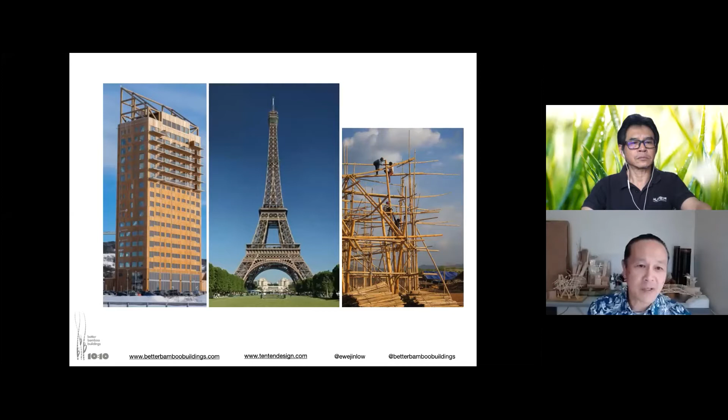Thank you. I usually start my talks with this slide. We start from the left. Today, currently, this is the tallest timber building in the world at 83 meters. And in the middle, you will see a familiar building, the Eiffel Tower, at 300 meters. Strangely enough, it was completed in 1889, not 1989, but 1889, some time ago. And to the far right, you will see...

almost like a 3-story bamboo building on a little island called Sumba in Indonesia. I always put this in to really compare how bamboo is re-emerging. It is an old material from many thousands of years ago, but it is re-emerging in the world. It has a lot to catch up on.

There are only a few ISO standards in the world for bamboo. But if you think about timber and steel, there are hundreds and hundreds of standards that we all in the design and building industry use, are familiar with, and are moderated by. Whereas bamboo is young, it is a new kid on the ground, and it is slowly re-emerging.

I also share this particular slide because through the generations, bamboo has had a terrible reputation. It rots, it has fungus on it, it cracks, it doesn't last. The little bamboo hut that is in the paddy fields that we are used to, our grandfathers used to say, oh, 2 years and I have to replace everything. I have to get the roof up, I have to get new poles again, and the bamboo is eaten by termites. So the reputation for bamboo is not good.

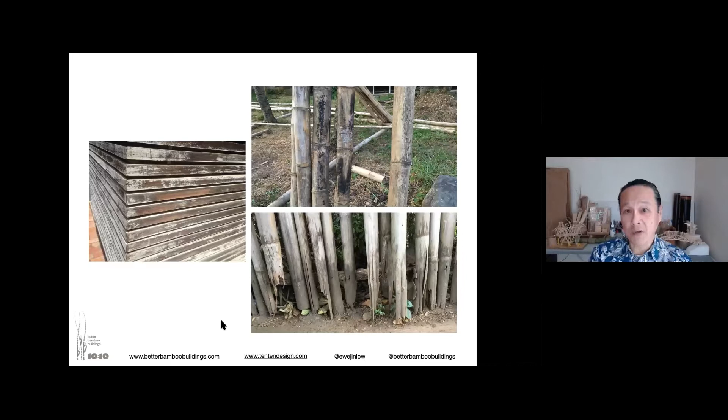But if you treat bamboo well, if you design bamboo well, it will not rot, it will not fade, it will last a lifetime. Let me go through some of the hotspots of bamboo, especially around the ASEAN nations, and a bit about South America.

This is to give you a bit of an overview of what is happening around the world with bamboo architecture. We don't see much of it in Malaysia, right? Although this is slowly starting to change, but around the world there are many bamboo buildings, many fascinating and impressive bamboo buildings. Let's start with Vietnam on this slide.

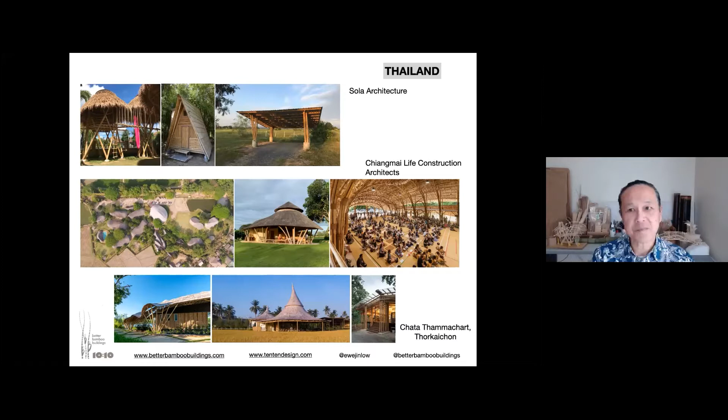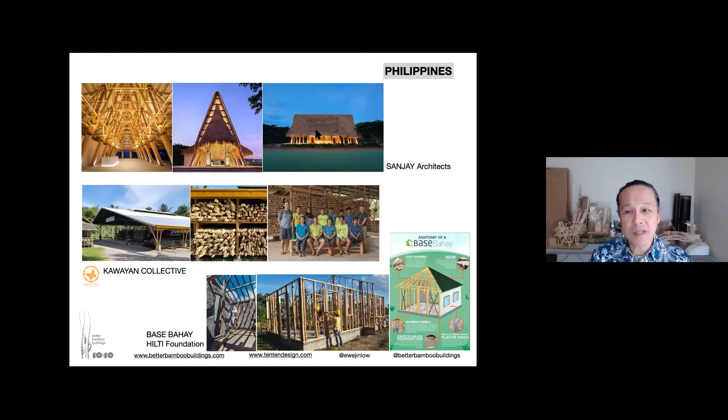From the Philippines, we move to Indonesia. Indonesia would be the prime hotbed of bamboo. A lot happened from the 2000s when the World Bamboo Congress was held there, and people like Linda Garland started off bamboo in Bali in a very big way, together with, of course, John Hardy, who got into it, and then later Ibuku and Ilora Hardy.

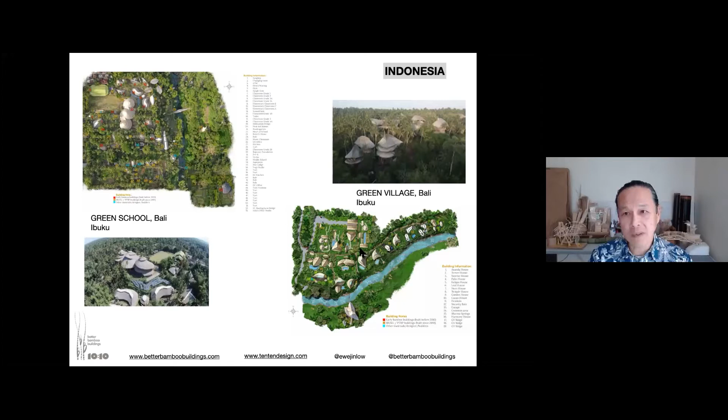Green Village has more than 20 bamboo buildings, some of which are really luxurious and trend-leading. This school in Bali, also by Ibuku, has more than 20 bamboo buildings, and they are all full bamboo buildings.

The amount of buildings and the stage at which all these were built created almost a bamboo explosion within Bali, within Indonesia. The need for good treated bamboo, people who could draft, design, and build in bamboo—we managed to pull out within Indonesian culture the creativity and strength to build these buildings. In Bali especially, you can go to a hardware shop to buy a piece of treated bamboo, place an order, and it'll come.

I hope to see more of this in many ASEAN countries, and I think we will continue to see growth in this way for many countries around ASEAN. In China—

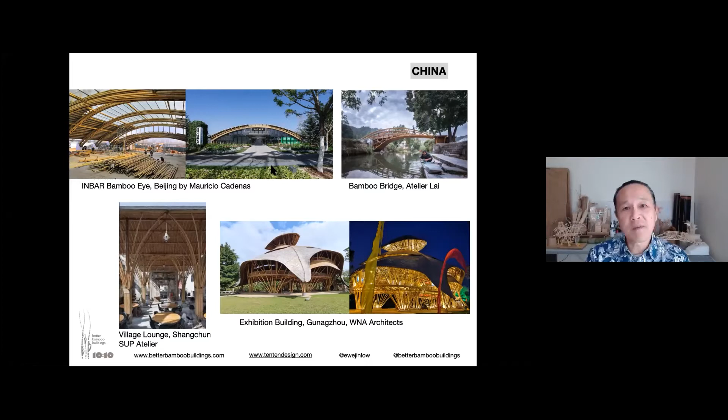An emerging firm, Arquitectura Mixta, from Colombia—Jamie and Uma and a few others. This firm you have to look out for; they are really coming up within South America, and their work is significant. Look them up on Instagram. The LUUM Temple involves Arquitectura Mixta as well—it's a beautiful grid shell building. Have a look at that.

Jorg Stamm is another pioneer. He is from Colombia, based in Costa Rica, and does a lot of reciprocal structures. He was fundamental also in setting up a lot of buildings in the Green School.

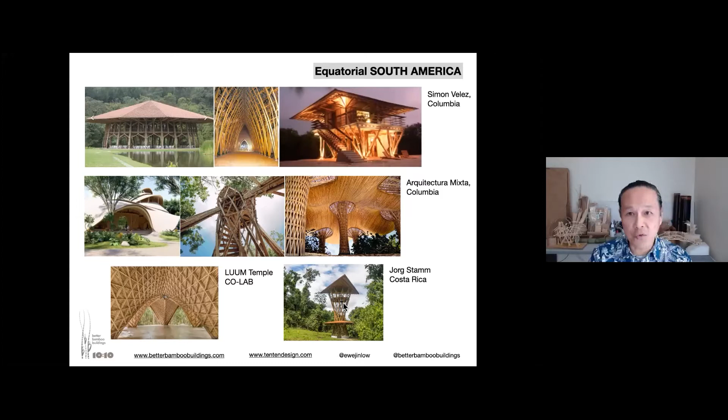The idea of showing you all these buildings from different countries is that I wanted to put in place a bamboo buildings map within ASEAN. In Indonesia, there are more than 200 bamboo buildings, many accepted and approved by the authorities. In Thailand, more than 70 buildings. In Vietnam and the Philippines, more than 30 buildings each. This has happened through Southeast Asia from 2010 onwards, where the use of bamboo in architecture started ramping up.

These are really not exploited yet due to maybe not enough treatment facilities, improper harvesting, and all these need to be raised up, equivalent to the other countries I mentioned.

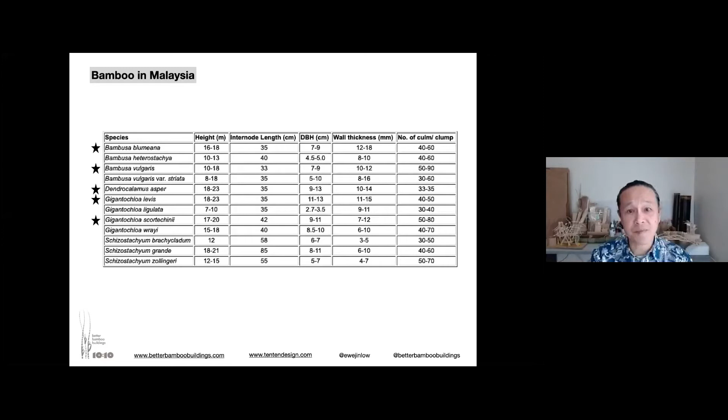In my journey pre-COVID, I also managed to spend some time in Sabah, looking at some of the species in Sabah because we had a potential project there.

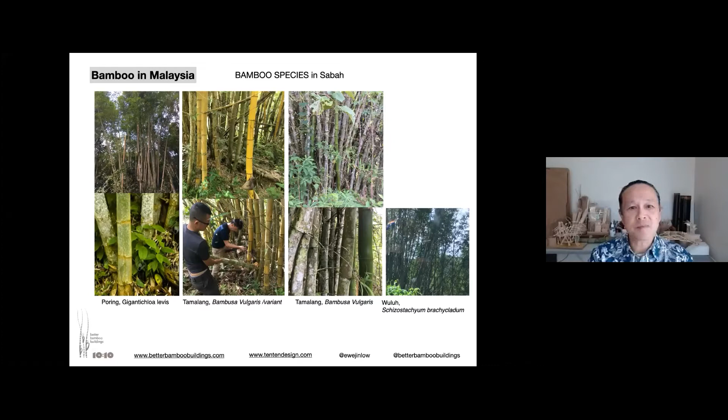And of course, you need training, you need precedent, and you need a lot of development. The government itself cannot do it. For most of the countries that I've mentioned before, through experience and through discussing with people, it is very tough to get government to move. We need a lot of other protagonists from the NGOs and also individuals that push. Dr. Tan mentioned Ahmad Mazlan, and of course there are a few others within Malaysia, like Lucas Lu of SEED, who's really pushing in terms of upstream bamboo infrastructure to get this going. And it will happen, it will happen.

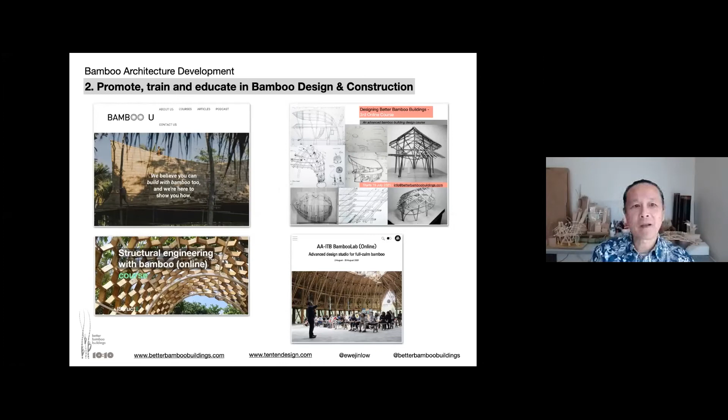To move bamboo ahead and to be able to socialize this with government and compliance organizations, that's very important. As Dr. Tan was saying, when you mention bamboo to engineers or even to approving authorities, they almost fall off the chair and say, no, I don't know anything about bamboo and there's not much knowledge. But this is changing, as you can see, from all these hotspots. All these buildings are already up, they have permits and they are going.

How did that happen? How did that happen in more countries than others? It is a process of socializing and familiarizing, using ISO standards, for example, this new ISO standard that's come out only a month ago or less, gives you the standards to be able to design a 7-meter bamboo building.

And I think some of the ways, through my experience working with authorities and compliance, is to socialize with them, show them what has been done around the regions, even take them, if the project is big enough and the budget is right, take them on a visit, take them to Green School, take them to other countries, to Thailand, to Philippines, to see what's been built.

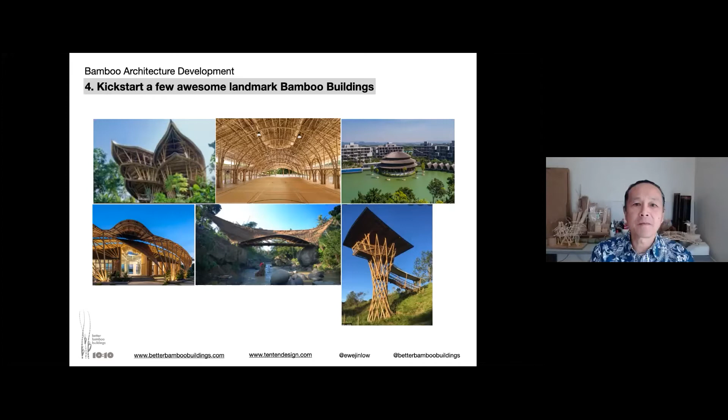I'm trying to share with you also a bit of my bamboo journey, if you don't mind. A lot of it, as Scarlett mentioned, started as lead architect in Ibuku. It was a 3.5-year period of total immersion, and I thank Ibuku, actually. I thank Ibuku and Elora and the team for imparting all this to me, having immersed now to be able to share what I learned and continue to learn in bamboo. I hope to continue to develop together the bamboo architecture world.

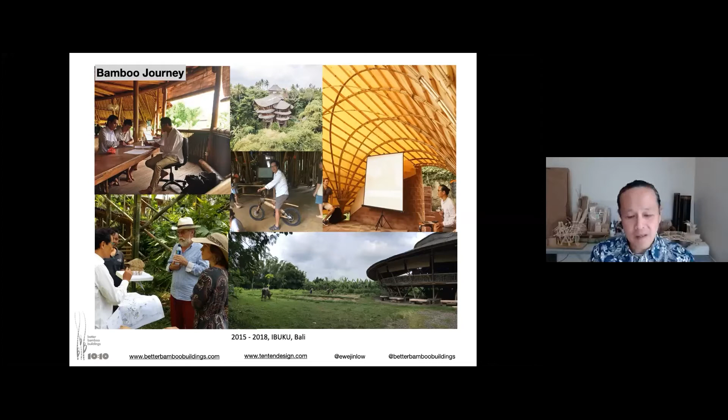As I was leaving Ibuku, I had the privilege, together with my wife Ling, to design and build this house, Kamsia House. Kamsia means gratitude - it's gratitude of being able to build this house and live within nature. As architects, a lot of us design and construct houses for other people, but I've had the privilege to design, construct, and live in a bamboo house, to experience it, being able to live in it for two cycles - two years - to see how the house performs.

We also managed to build a little tree house in front of that house, near the stream, and again learning a lot from it as well.

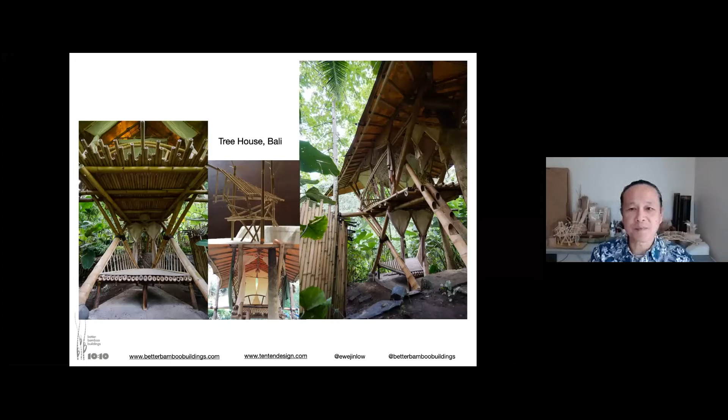This was KLAF two years ago. A real privilege, and a lot has happened since then from Klaf.

I managed to do some work with universities in Singapore, holding workshops. And this project is interesting - this is a foundation that's trying to propose a jungle school, a bit different from the green schools you're seeing, but their own version of a jungle school in Sabah.

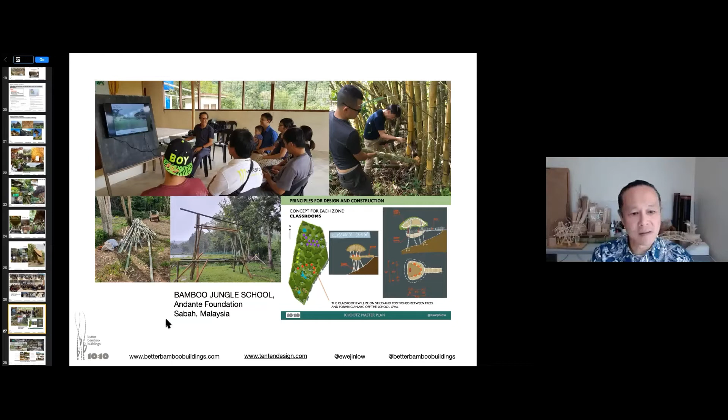From KLAF 2019, I hooked up with EPIC, a great bunch of people doing good work. They do a lot of work in the Orang Asli community, and my work with them is looking at their design, looking at how they operate, and also trying to push bamboo into their scope. I hope one day they will eventually build their first full bamboo Orang Asli house. Come on, EPIC, those who are listening.

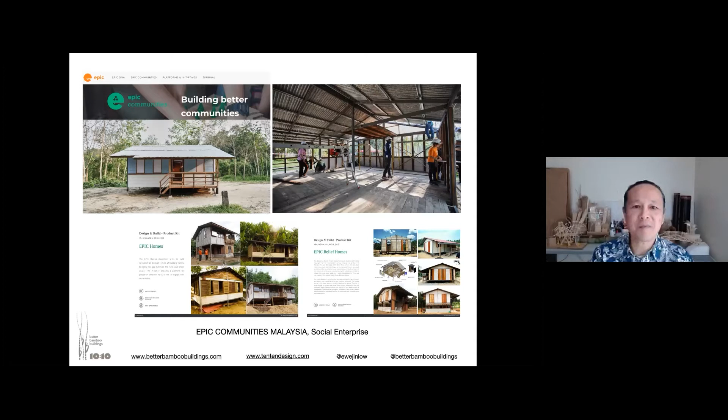I also want to put a plug for this young man, Daniel Thiel. You will notice if you go to CNA News that he has been featured today, top first page. His work is really working with the Orang Asli as well, trying to help them. His most recent venture is biji buah durian, selling Asli durian - different species, 10 to 15 species that you can order online. Go and help this young man, and also, of course, the Orang Asli.

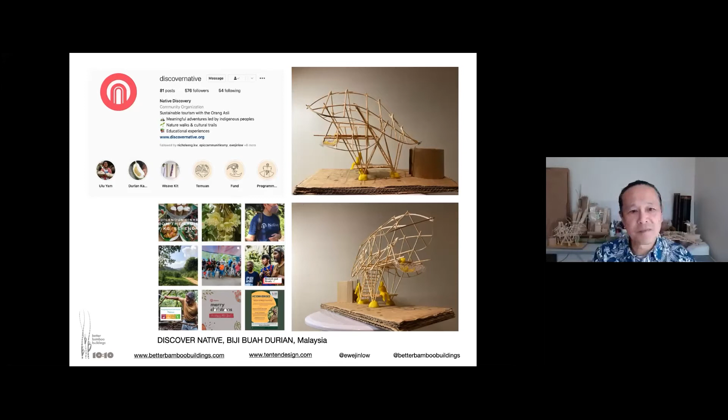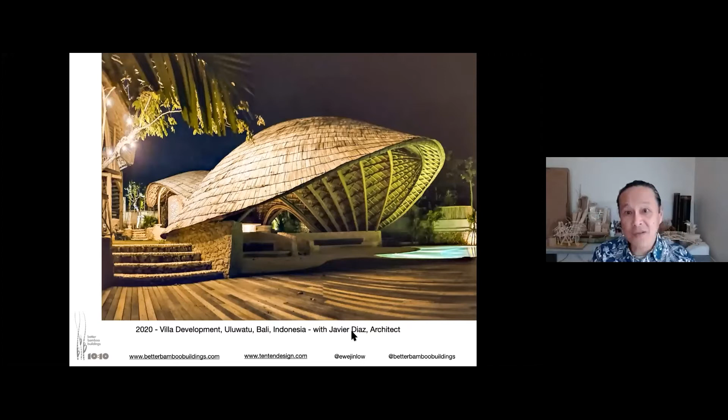Lately also, I finished with Javier in Bali, this resort project. We just completed it now. Fingers crossed, we're hoping for tourists to return to Bali to be able to enjoy this building.

So coming in to the close, I'd like to share a few more things. Scarlett mentioned this Instagram account that I started during COVID.

I had to pivot, think of something else to do because we were stuck in a little cabin in Melbourne. I started this Instagram account called BetterBambooBuildings. This has now grown quite well over a year and a bit.

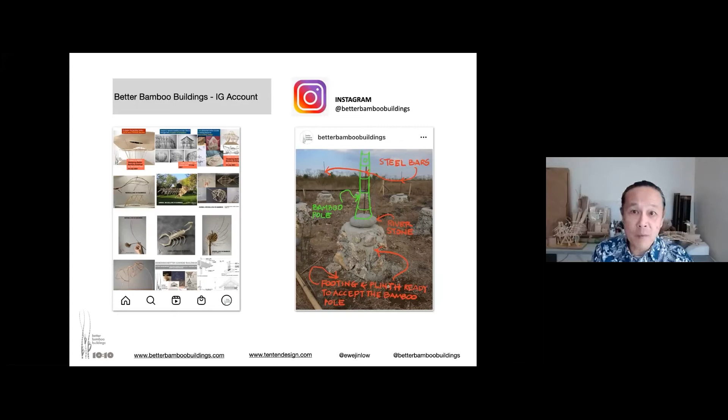From the Instagram account, I wanted to share further and set up a blog with articles on bamboo, where people could come as guest bloggers and share what they have. We now have about 30 articles on it—please go on it if you want to find out more. There are 2 articles coming out in the next week or two, which I'm co-writing with Alvin Tejada from the Philippines, and also another article with Carmen Yong from Malaysia.

From this blog, which has grown quite well and is getting good response online, I started an online course on designing bamboo buildings, which has now just started its 3rd run. Hello to those listening, participants out there. We are looking forward to starting the 4th one in October.

From the course, we have the privilege of writing a book, coming out at Christmas. It is a book on bamboo architecture, and we have selected 30 contemporary bamboo buildings to feature.

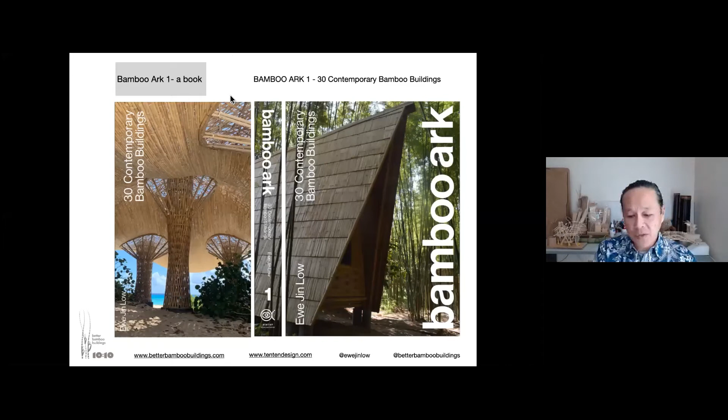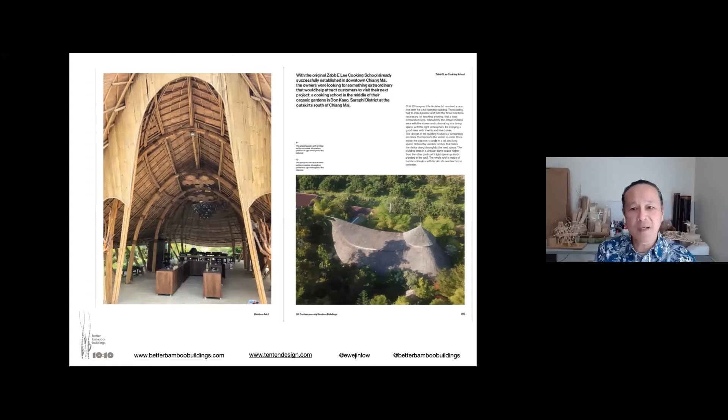I'll just run through this now, coming to a close. One of the buildings is from Chiang Mai Life Architects—this is a cooking school, and I'll show you a typical spread of it. These are the early layouts. This book really concentrates on how a bamboo building is structured.

You can see from here, going through the elements of the structure and discussing it, and of course talking about the buildings as well with wonderful photos that these designers and architects have provided. Some with really good drawings and interesting construction stages as well.

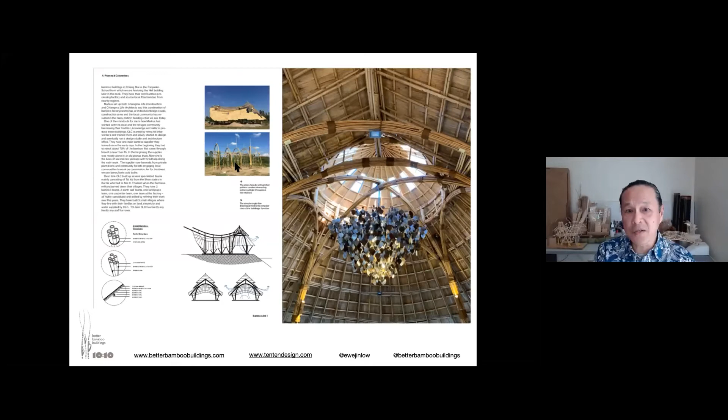So there you go. I hope that this has conveyed a bit about bamboo architecture. I'll just end by saying, as surely as the sun rises every morning, bamboo will also rise and shine. Thank you.

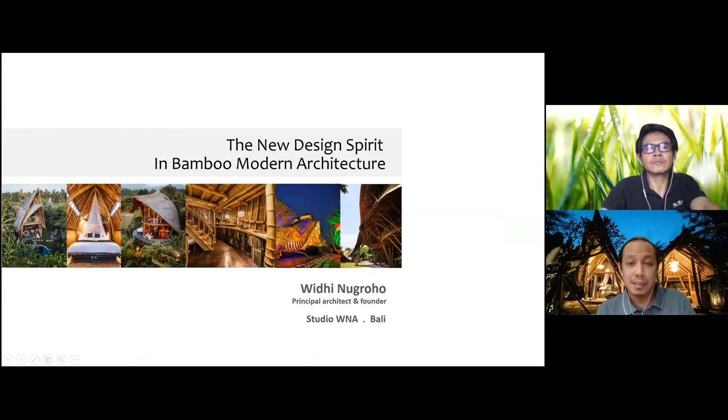Okay, I will start my presentation. My name is Widhi Nugroho, I come from Bali, Indonesia. Studio WNA is a bamboo architect specialist in Bali, Indonesia, and many of our projects are in the hospitality business, such as a bamboo beach club, bamboo wedding venues, villas, glamping, restaurants, and some boutique resorts.

In this presentation, there are three projects that I want to show you: number one is Felufanya Bali, then Rison Ubud, and the last one is Nansa Exhibition House. I will start with Felufanya.

Felufanya is a glamping project—like a camping style with hotel facilities. It's a little different from conventional hotels because the glamping we design has a unique design in every unit, with comfortable designs using sustainable material, bamboo, and most importantly, it must look Instagrammable. The glamping provides a different experience from usual hotels.

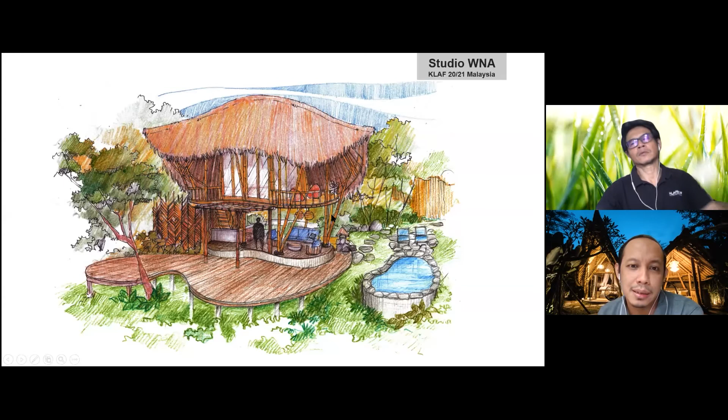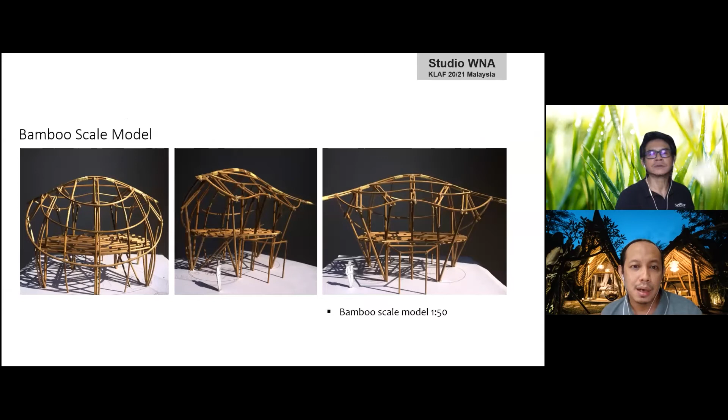So it's a small project basically, and it is a bamboo scale model. It's a very important process of the design because it's a little bit difficult to explain to the contractor if we use working drawings, standard working drawings. So the best way is to make the scale models at 1/50, so the bamboo contractor can see all the structures, the joints and everything.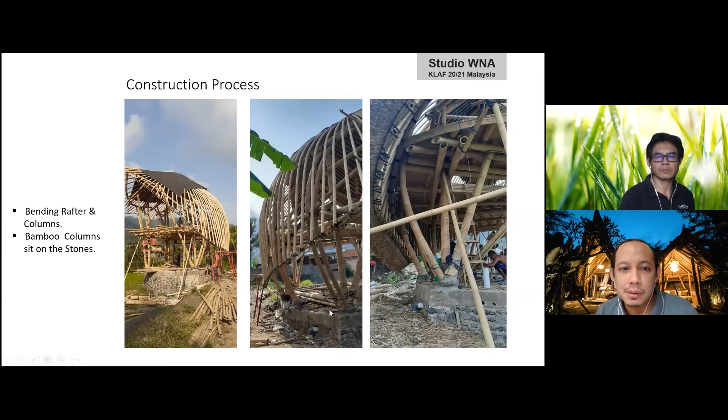Yeah, you can see the curve floor plan here, and also the roof. We use local thatch roof. And basically, this is the rice field.

And it is the finished construction. So yeah, you can see this plunge pool. The entrance is from here, the stepping stones. And it is the living room, and the bedroom on the top. So this building faces the beautiful rice field, and also the Agung Mount in Bali, the biggest mount in Bali.

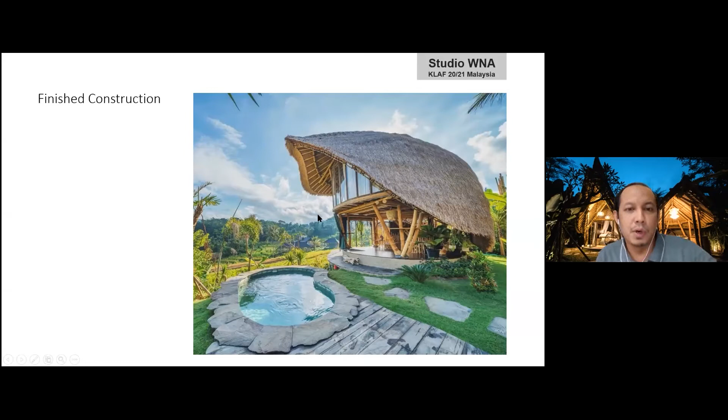So you can see this oval idea, you can see it from the roof. So yeah, it is the living area. It is the bed, and it is the shower, the semi-outdoor shower, still under the roof.

And we have a hanging bed here. This is the balcony. Yeah, it is the view from a different side. So from this bed, you can see the beautiful rice field and Gunung Agung.

Yeah, it is the view from the living room. We have rain screens. If the rain comes, we need to close the walls, the openings. Sometimes, yeah, sometimes.

It is the pantry, and we use the electric stove, and simple lighting. So we designed also the interior, all this bamboo. For this project, we use scrap wood for this floor, so we can combine with the other materials.

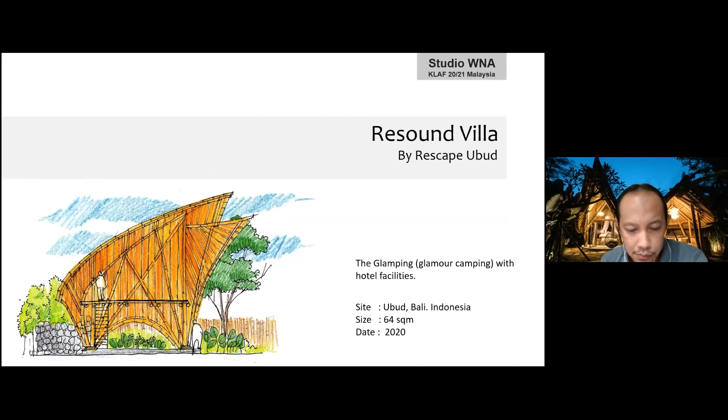Basically my design comes from the many things I've learned from our cultures, especially Balinese culture and architecture. My design idea comes from traditional architecture, but right now I try to make it in new designs and for new functions, not only for the house, but for many functions.

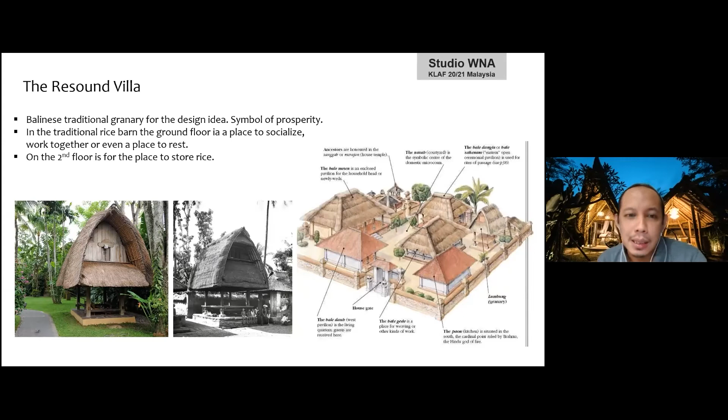The Resound Villa idea comes from Balinese traditional granary. The granary is a symbol of prosperity. In the right photo you can see one compound of a Balinese family house and the granary. The Balinese concept is to have separate dwellings for the parents, children, kitchen, and also for the granary. So the design idea comes from this granary.

We have a private semi-outdoor shower and toilet here. Yeah, it's a glamping, so we have hotel facilities. We have a pool, and sometimes we have a hot pool also, and it's quite different from other conventional hotels.

In Bali there are a lot of high-end resorts, five-star hotels, and villas, so I have a lot of competitors for my clients. My client came to me and asked me to design this glamping because they wanted something different from the other hotels.

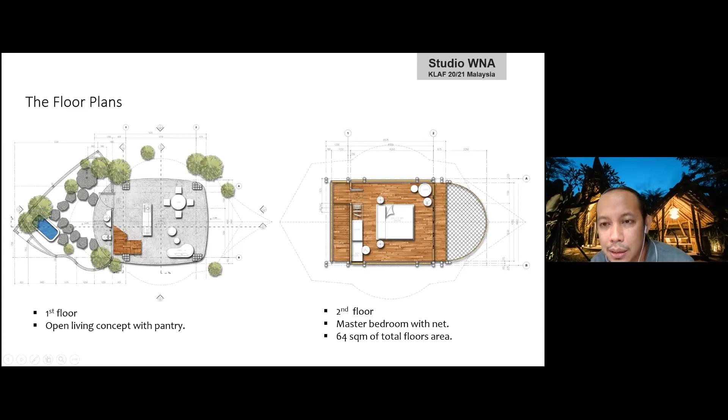It is the second floor, the master bedroom. We have a net also here. We design the landscape too sometimes - the concept is a Balinese tropical garden. We use local trees, flowers, and local materials. All of our glamping designs have our own private gardens, so guests don't only stay in the room like a conventional hotel block, but in this glamping they can spend the days in the gardens to see the beautiful view around.

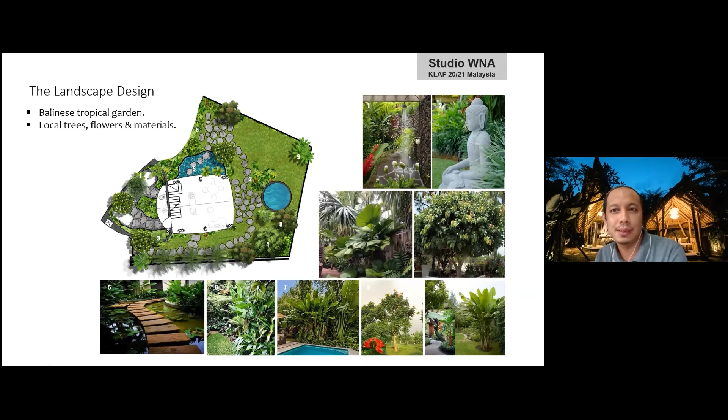These structures are with the rafters. It is the construction process. In this project we have 3 units of glamping, all with different design, different style, different concept. The result is this one - you can see in this photo the workers installing the rafters.

Honestly, it's not easy to bend the bamboo following the models. You can see this rafter is not too smooth, so the contractor needed to change it more than 2 or 3 times, because I told them it's not good. So they replaced the rafter and installed it again, and I said it's not good, and they replaced it again. So yeah, it's not easy, honestly.

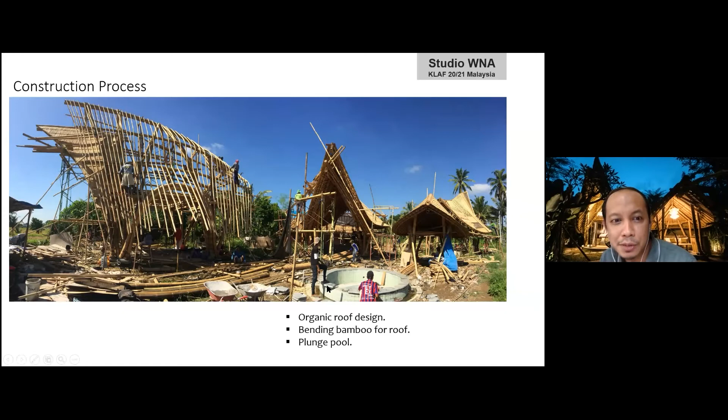We use a bamboo roof and put a skylight here. So almost 20 to 30% the architect needs to adjust on site. We need to come and check the quality of the buildings, especially for the curved columns we use - we need to check because it's quite difficult to make. We need professional bamboo workers to do it.

This column is like a clump of bamboo growing here. There are 9 bamboo poles in one clump. Yeah, it's very, very strong. And you can see we use double beams here.

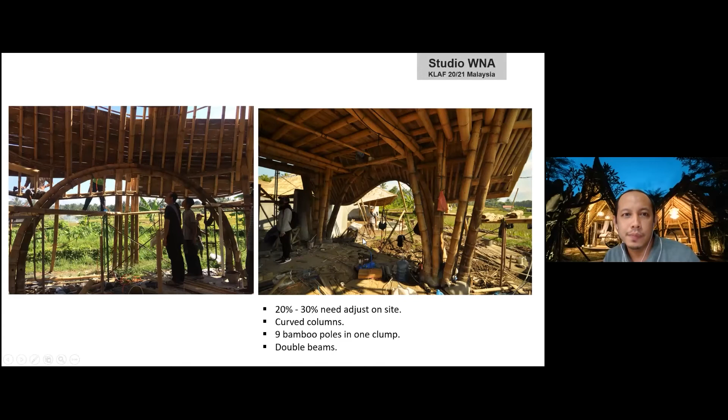The span is about 5.5 meters between this pole and the other pole. And this is the finished construction. Very simple structure, very simple design.

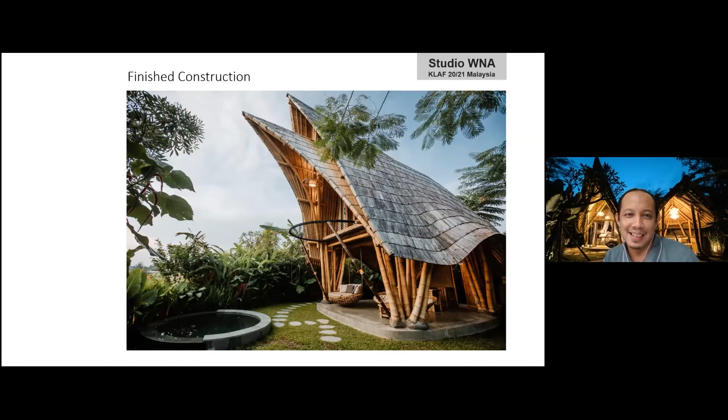Around these glampings is rice field and coconut trees. We use flowers and plants for the boundary, so we have good privacy here.

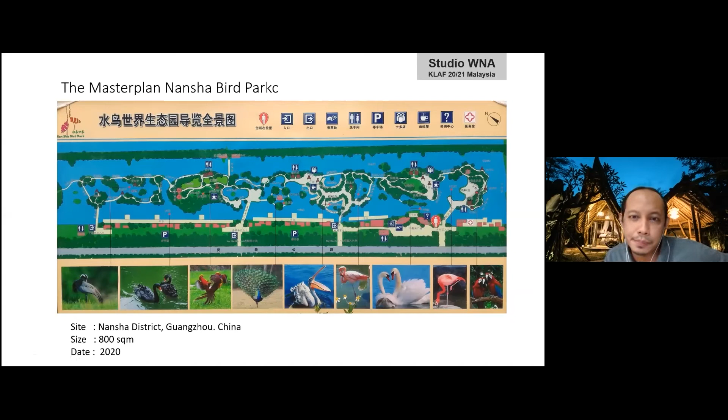It is the site, so you can see the lagoon here. It's for the birds.

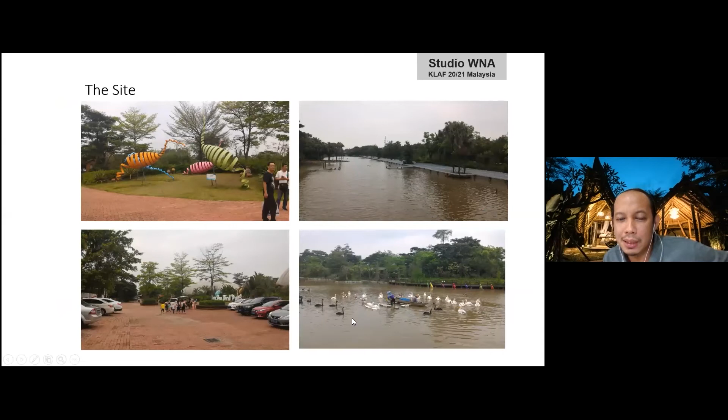So the design process is to find the idea. It's quite difficult to find the idea for this project, so we just went back to the site and felt the spirit of the place, and saw the birds that come from around the world, from Africa. Many birds stay here, so we think the bird is a good idea to have for the design. So it is the idea.

These 2 birds symbolize the good relationship between Indonesia and China. The exhibition house is like a showroom for artwork and craft from Indonesia, Bali, in China, but it's owned by Chinese in Guangzhou. So it is like a symbol of good relationship between Indonesia and China. The idea comes from these 2 birds, and we are hugging each other.

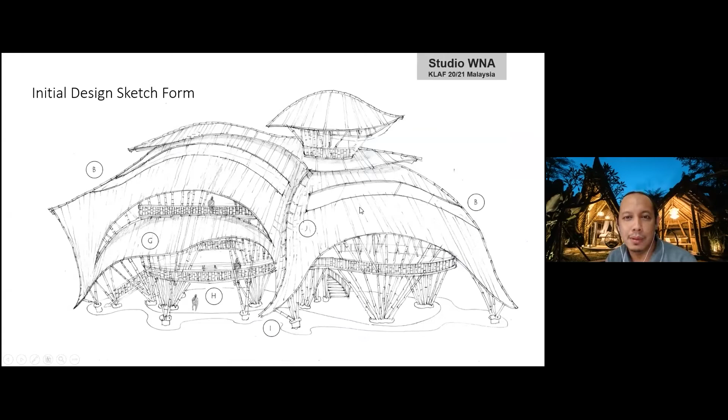It's the rendering sketch. It is the hugging birds, into the building design. So it is the main entrance. We try to imagine the quality of the space around the buildings, also with the birds, with the trees around the buildings.

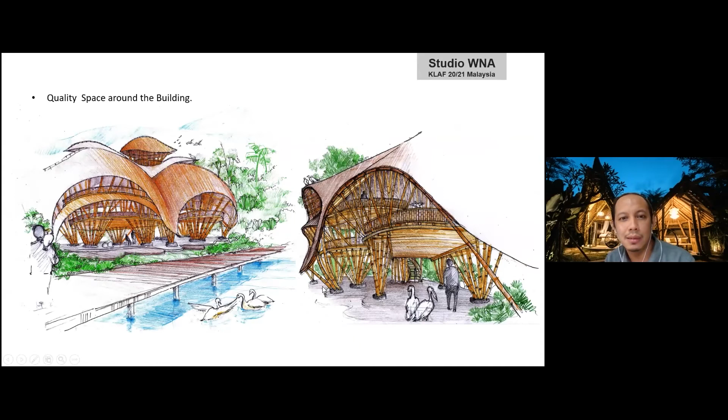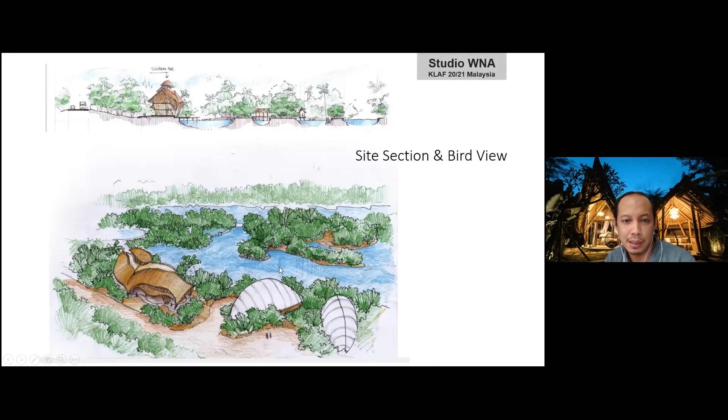This is the section of the site. It is the highway, and it is the exhibition house, and it is the lagoon. So it is the buildings, and it is the old exhibition buildings, the existing ones. You can see the organic floor plans, and the columns, the clumps of the columns.

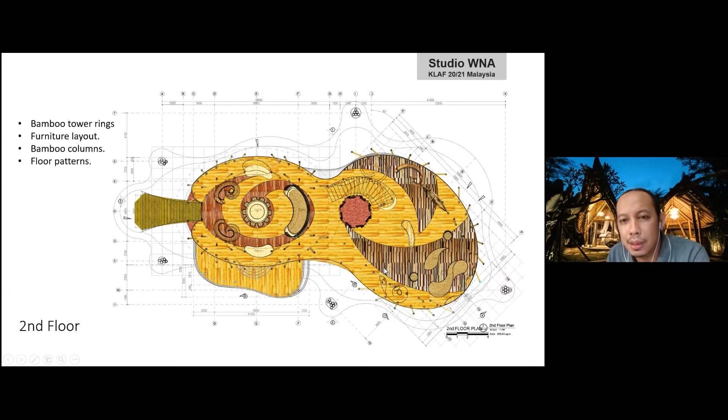It is the main entrance into the second floor. We put some furniture layout, and you can see the direction of the bamboo columns. Also, we play with the floor patterns, combining black bamboo, natural color bamboo, and also some scrap wood, local scrap wood.

This is the third floor here. Access from this staircase, the hall, and the tower continues to the top floor, and it is the top floor.

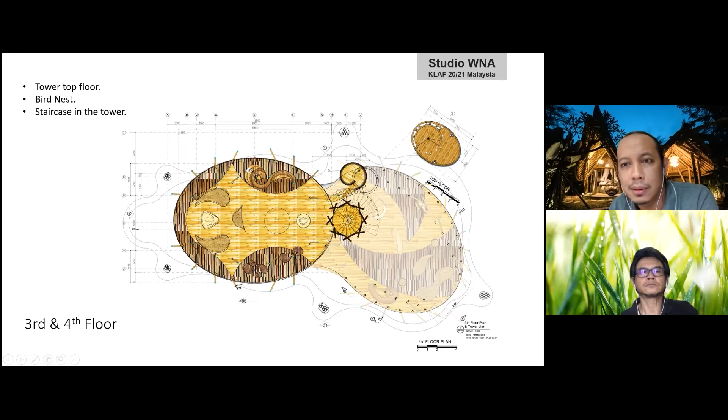Yeah, these are very important drawings. Every architect loves to see the sections, so you can see these important sections. The building height is 21.5 meters, or 41 feet.

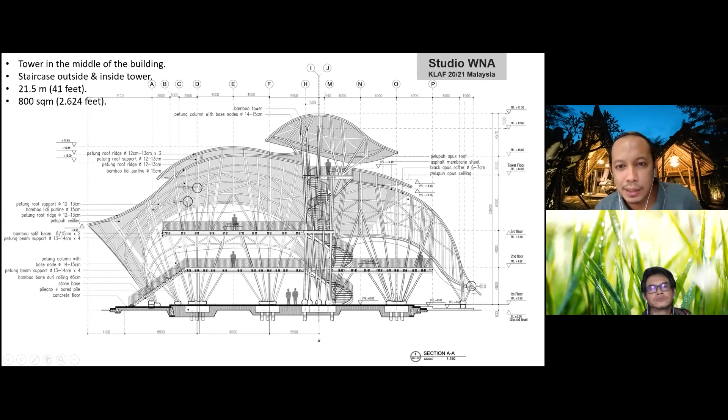Here in these points, it is the access from outside to the second floor. It is the staircase. You can see it is the tower, and the staircase is outside the tower.

But at the second floor we have the staircase inside the tower. So you can see also the structures of the bamboo columns.

It is the bamboo scale models. You can see the human scale here, so it's quite a big building for bamboo.

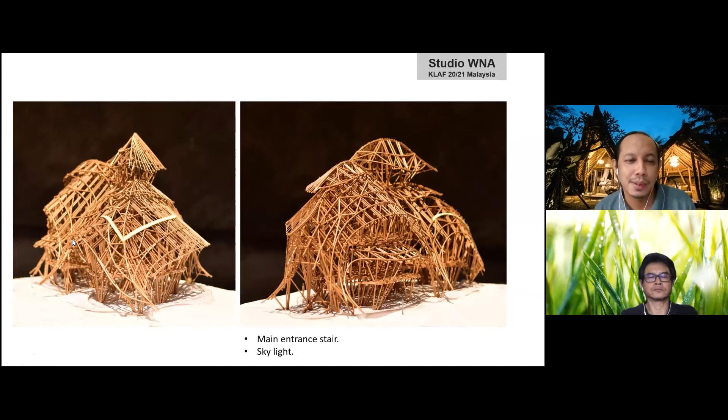And it's the staircase into the second floor. We have a skylight here, so we can have shadow inside the building. This is the structural analysis.

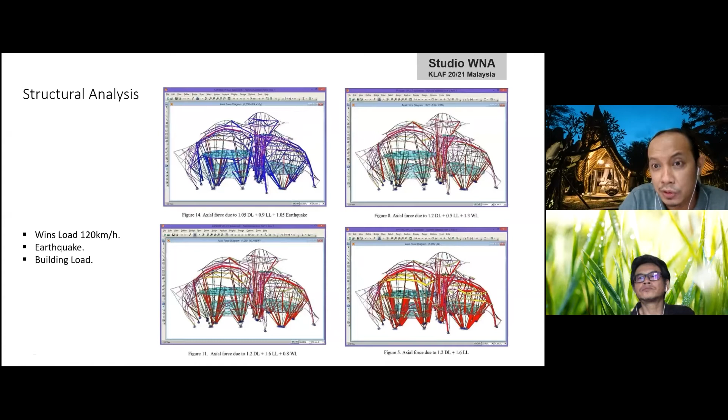If you ask me about the structures, yeah, we have a civil engineer that specializes in bamboo construction. So my engineers calculate all the wind loads, earthquakes, building loads. As an architect, I need to make sure my client knows the building is safe for the people, just to make sure all the structure is very strong.

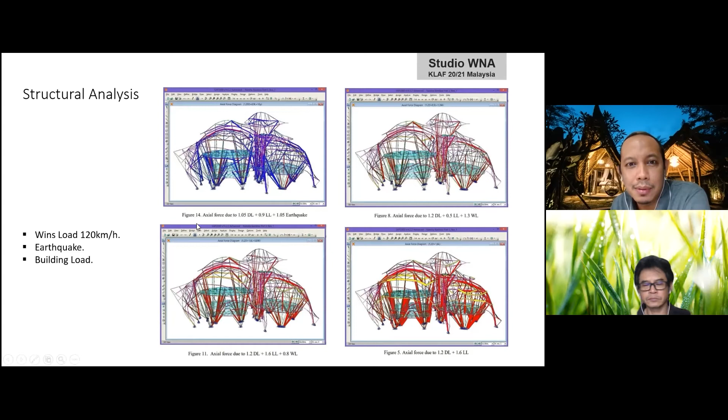Yeah, it is a foundation on site. It is the foundation tower here in the middle, and it is the clumps of the columns here.

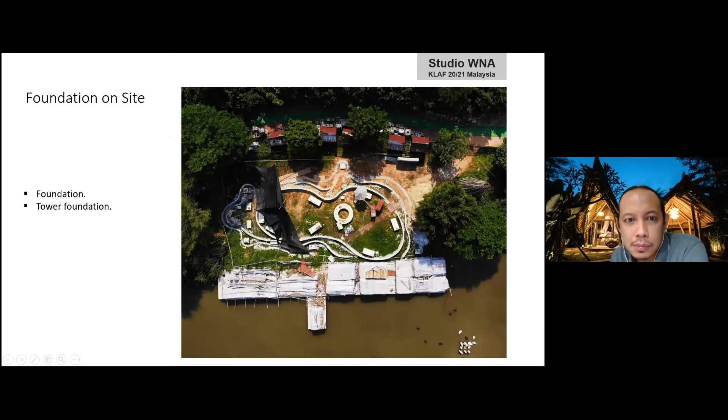And this is the construction process. I think every architect loves to see the photos of the building process, because from this we can learn a lot.

In bamboo construction, we start to install the split beam, not the columns. It's very different from other building constructions. You can see in my cursor, it is the split beam, we call it, this one, from bamboo.

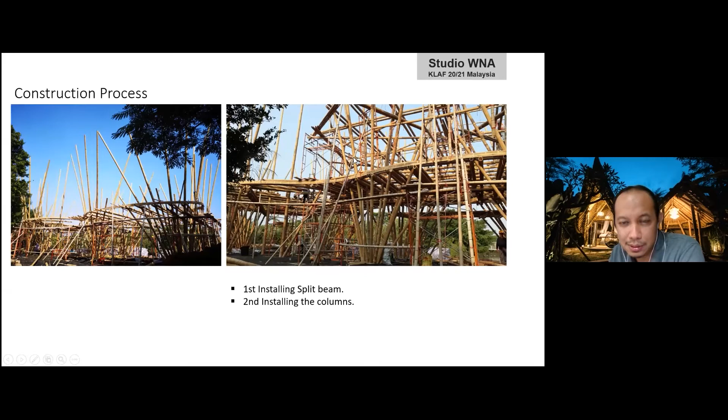And after that, we install the columns here. We install the double beam here. It is the ring beam for the tower.

So basically it's a split, some of split, and we clamp it with iron, or we tie it with cable or something. So we make it as a beam.

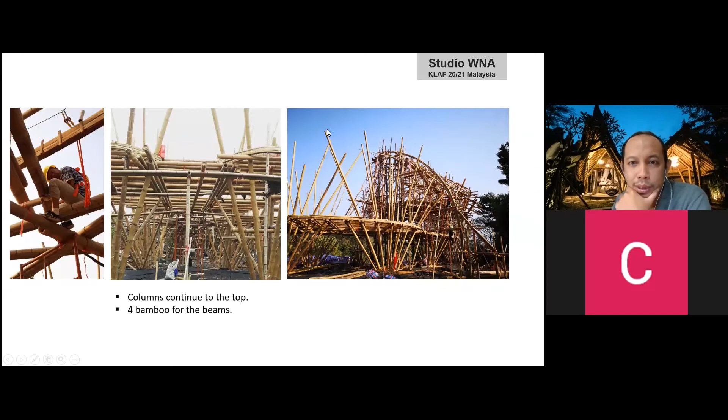So this column continues to the top. This bamboo column is almost 12 meters here, so it continues to the roof.

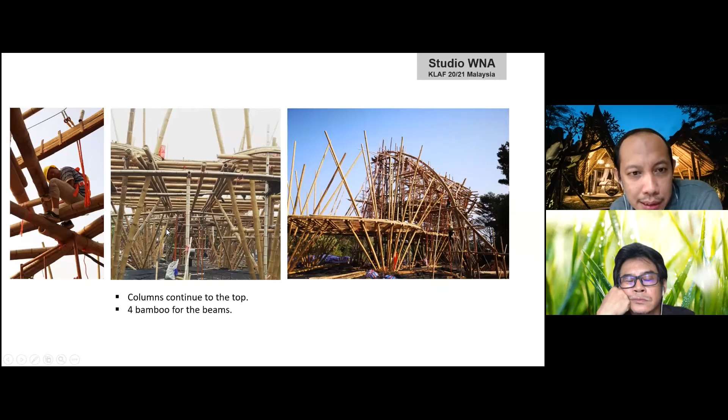You can see this beam, double beam, so we have 4 beams. This roof support beam, this roof support, we install the roof support.

Also this rafter at this photo. And yeah, this, we call it bracing. That is very, very important to make the structure rigid.

This one, and you can see it is the ridge of the roof. We use a double bamboo. And we have a jack roof here.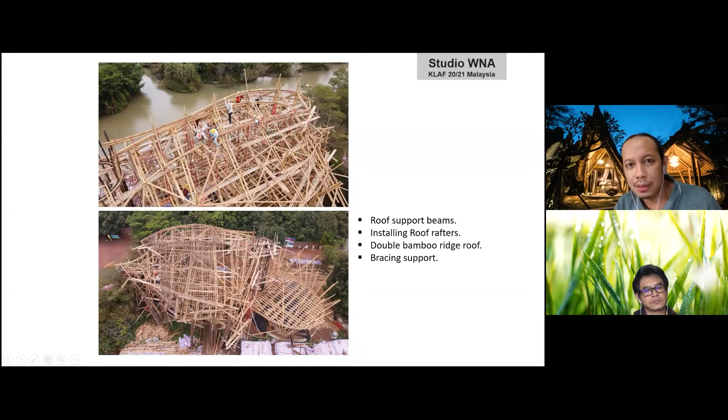It is, yeah, there is no technology here. We just use, you know, bamboo skilled workers from Bali.

They are 10 people with 5 local laborers in China. So you can imagine these workers, they install the bamboo one by one on top of the roof. It's around 17 meters from the ground.

And yeah, at that time it's quite cold, 9 degrees Celsius, so for Balinese it's very cold.

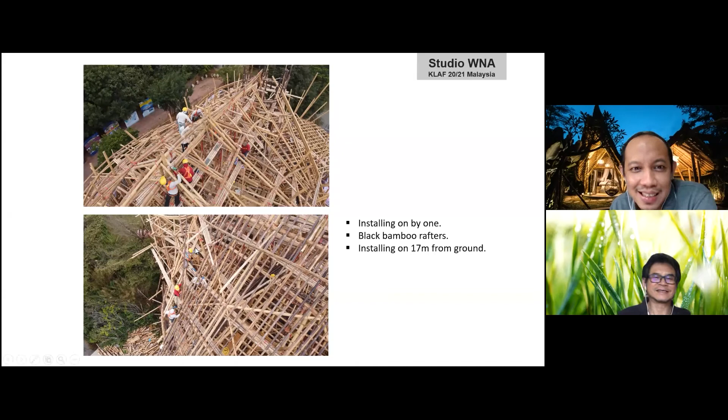This one, half structure of the roof. We use black bamboo. You can see these workers.

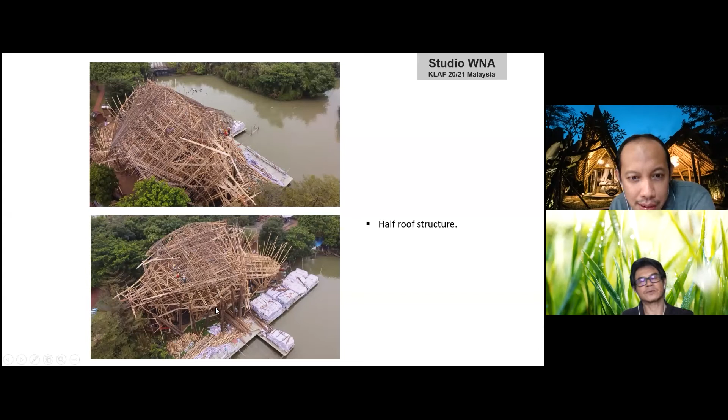It's the backbone of the bird, this one. So half the roof is already finished.

You can see this, it is the tower. We use a black bamboo tower. This one, the black bamboo tower, right in the middle.

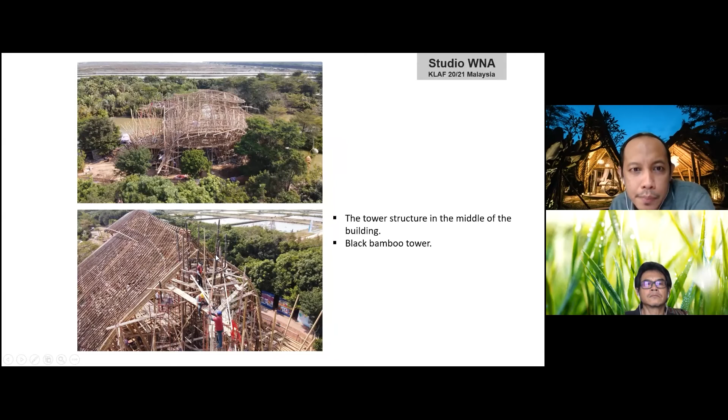Yeah, from the top of this tower, you can see this beautiful view of the Nansa area. You can see the ring beam to hold all the bamboo in the tower. This is the top of the roof, 21.5 meters.

This is, they start to install. Yeah, you can see it is the bird head with the wings.

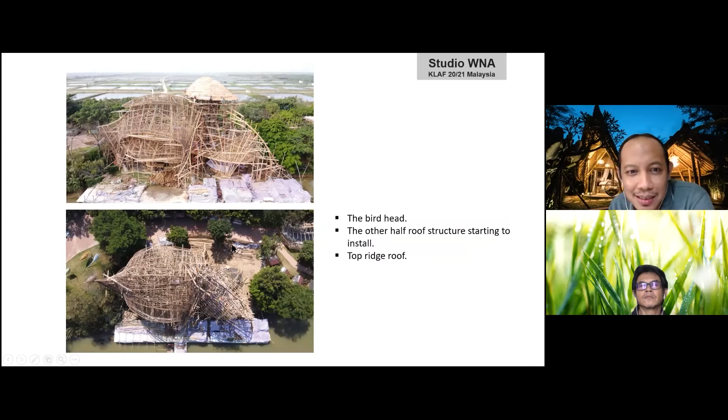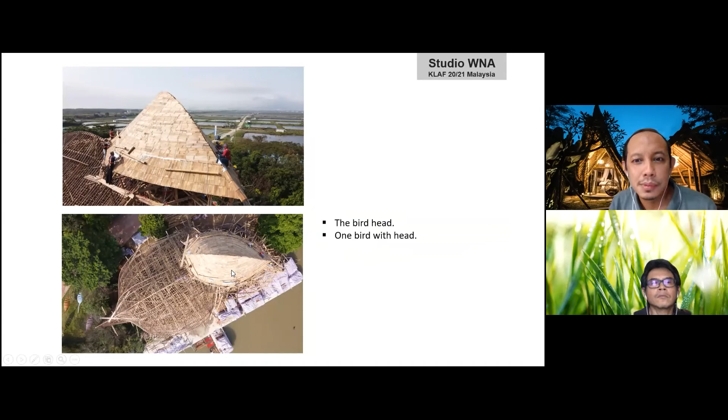They start to install the bamboo roof here on the top. The roof structure is complete, the rafters are there, but they just need to cover the structure with bamboo roof. Yeah, I like this photo very much.

The bamboo roof complete with the skylight here and with the jack roof. It's part of my design strategy to reduce the load of the winds, so the wind will flow from outside to inside and outside again.

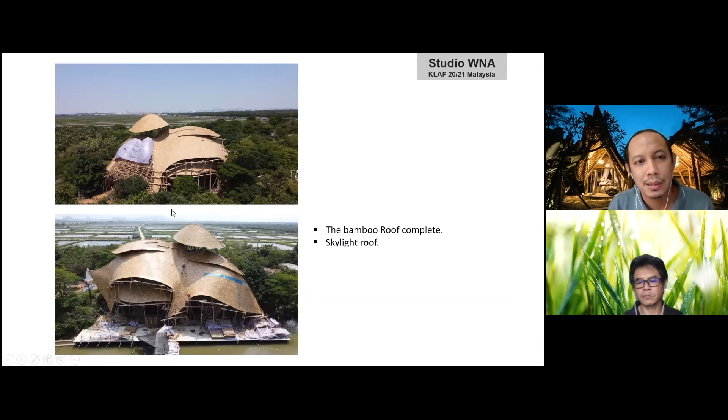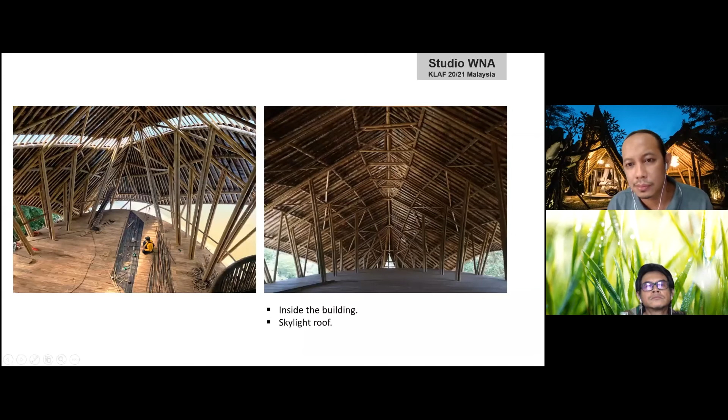This is the inside of the building, the skylight. Install the floor, it's the jack roof. Yeah, it is the finished construction. Simple lightings, and yeah, it's quite a good project for us.

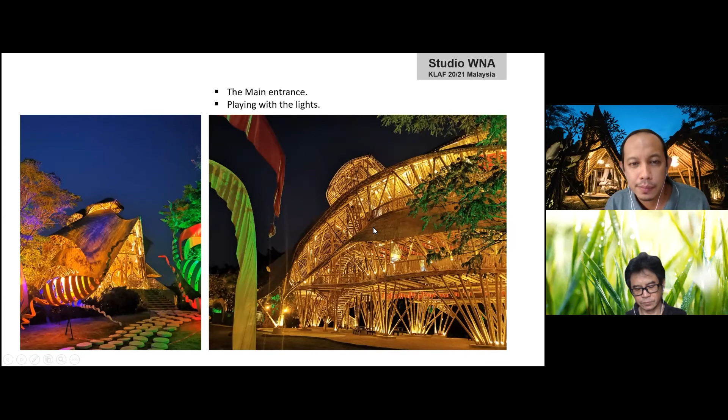And yeah, you can see this, the sand. So my client wants the Bali feeling, so they put the sand, so it feels like on the beach of Bali.

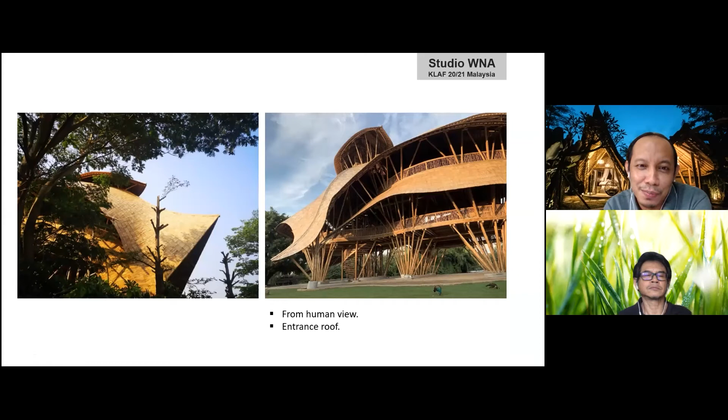Yeah, it's a big roof. If you ask me why the roof is so big, it's because we need to protect all the structures, all the bamboo from the rains, also from the humidity.

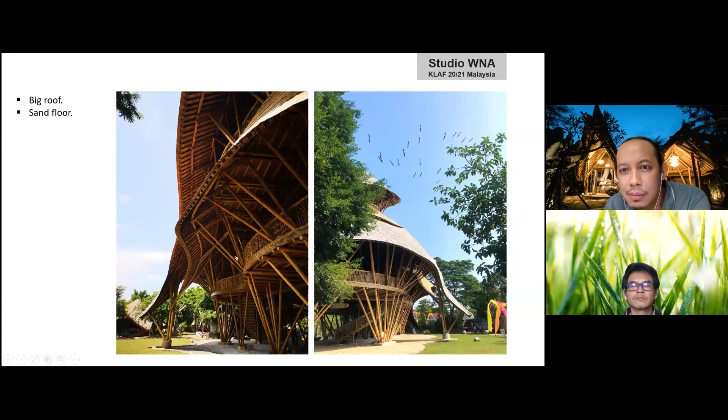You can see the scale of the human here. It is the floor design motif, the patterns. It's the jack roof with the skylight also here. It's the staircase inside the tower.

We use two colors of bamboo, so we have contrast colors. And I like the shadow here. This is the entrance door, the main entrance door, with the lights, floor design motif with black bamboo.

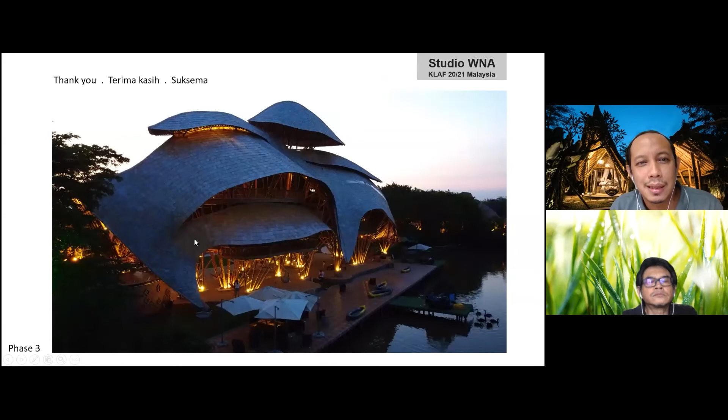Thank you, WIDHI. It's so amazing to see both our presenters presenting on the structures itself. I recently went through a little bit on bamboo buildings, and it's amazing to see how bamboo has become this sort of complex structure, not just typical small structures, but now amazing and awe-inspiring structures. It's quite organic, very sexy with all the curves and everything.